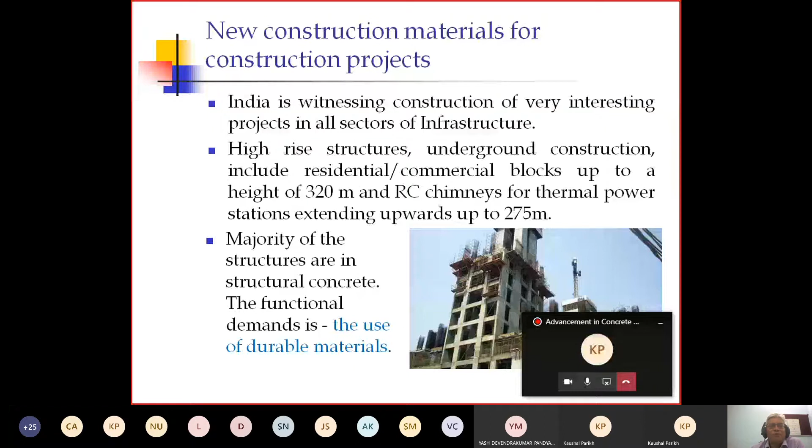Varieties of structures are there, but if you see majority of them, concrete is involved in one or other way. The functional demand is the use of durable material, and durability is a major concern in all construction projects. That is why a lot of evolution has taken place in the construction sector, particularly in the area of concrete. Time to time, the need for concrete has also changed, and accordingly, some new forms of concrete have to be used.

In the last two decades, we have seen many advances taking place in concrete that is gaining widespread acceptance, such as high strength concrete, high performance concrete, self-compacting concrete, durable concrete, using PPC, fly ash, slag, and other mineral admixtures.

Durability has gained much importance in the last two decades. Whichever structures were constructed 20, 30, 40 years back, we found a lot of deterioration because of the lack of the durability concept, and that is why the need arises to go for such kind of advances.

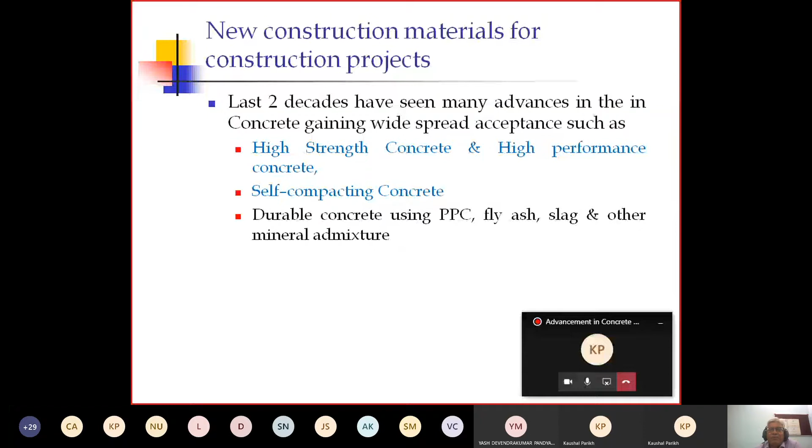Apart from basic structural material, the modern concrete projects require various secondary types of materials for varieties of purposes, such as construction chemicals and waterproofing materials. So there are varieties of such secondary materials that are used.

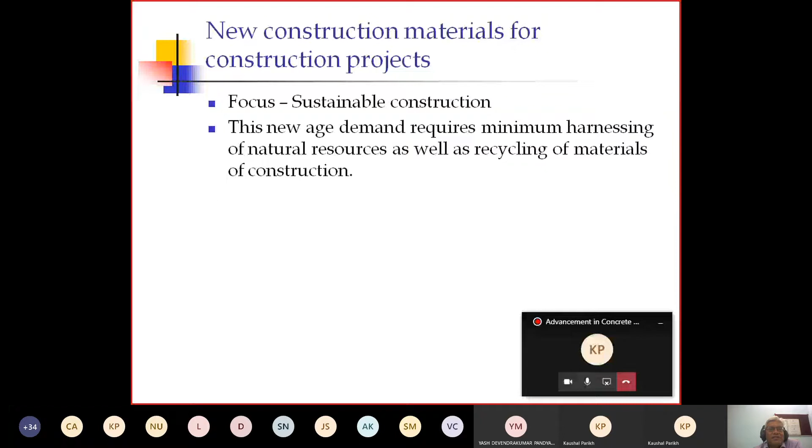Modern concrete is not only restricted to reinforced concrete and prestressed concrete, but there is widespread application in industrial uses - highway, pavement, landscape development, extreme weather conditions. So widespread applications are there, and that is why concrete is used in different applications.

Concrete has to improve its appearance, improve its aesthetic appearance, basically to look slim, designer, and colorful. Day by day, aesthetics plays an important role. Initially we have seen concrete look very bulky, but nowadays people prefer to go for its aesthetic appearance - it should also look slim, designer, colorful.

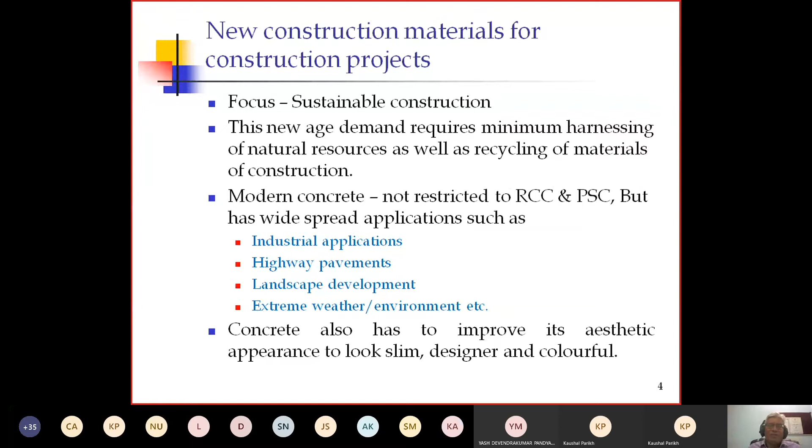So these are the different needs that arise as per the time, and time to time it evolves - concrete evolves with the basic need which is required for the human being.

So new age concrete should have many features that are required. Let us see which are the new features required in new age concrete.

First thing is it should look slim and sleek - that is one of the basic requirements. As human beings are also very conscious about their looks, looking for slim and sleek, the same way they prefer that our concrete should also look slim as well as sleek. Beauty naturally attracts human beings.

This is one of the very important things - minimum water to reduce the water demand. There is always a crisis of water, and that is why minimum consumption of water is required. Similarly, minimum or no cement to reduce the carbon emission.

As we know, the process of making cement involves carbon emissions, and that is one of the major concerns regarding environmental aspects or environmental issues. So that is why minimum or no cement is needed to reduce carbon emissions.

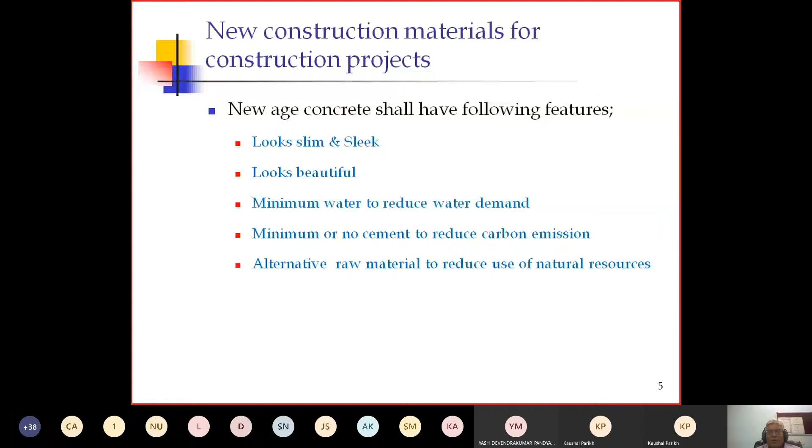Alternative raw material to reduce the use of natural resources - there is always pressure on the use of natural resources, so we need alternative raw materials for reducing natural resource consumption.

And the last and very important thing is durability for longer life and lesser reconstructions. So whatever we are constructing, it should sustain for a longer period or longer life, and that is required.

So durability is a major concern, and it is required to be incorporated and given more importance. That is why all the codes, our Indian Standard Code, IS code, has also given due importance to this aspect of durability, and many provisions related to the durability of concrete have been incorporated.

This durability has been found to be of more concern in the last couple of decades, and that is why many codes in all the different countries have incorporated provisions related to durability for longer life and lesser reconstructions. So when we are talking about durable concrete...

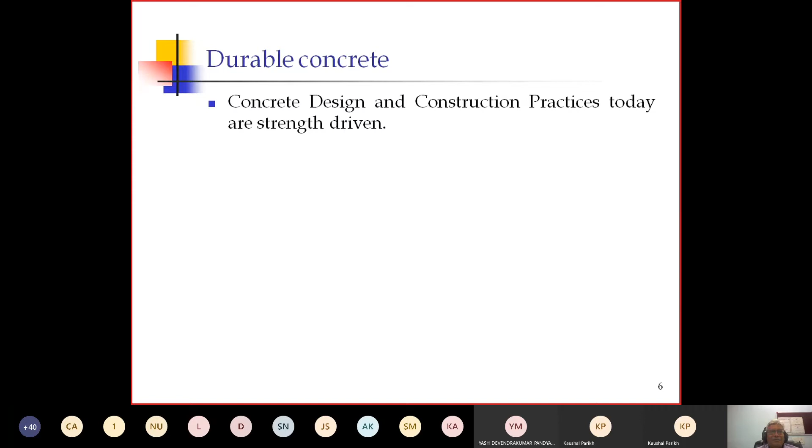Basically, if we see the majority of concrete design philosophy and construction practice, these are basically strength driven. Strength is the major concern, and then after that serviceability. But just in the last couple of years, durability has been incorporated into the IS code. Before that, there was very less concern for durability.

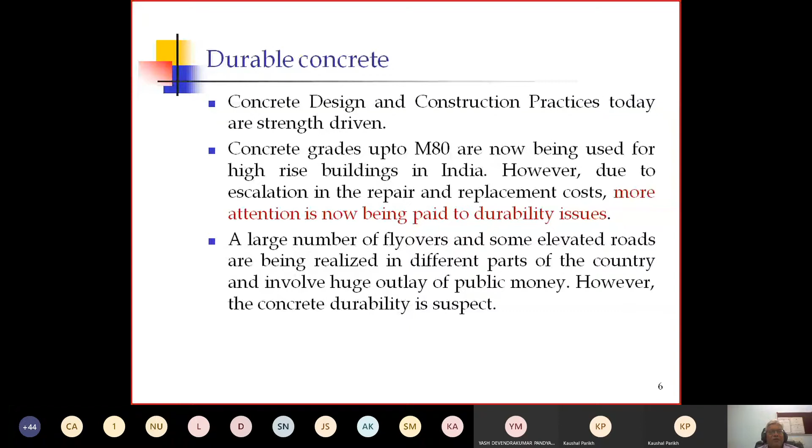A large number of flyovers and elevated roads are being realized in different parts of the country, involving huge outlay of public money. However, concrete durability is a concern. Large amounts of money are involved in such big projects, but when we talk about durability concern, it is always a suspect. So these are the issues.

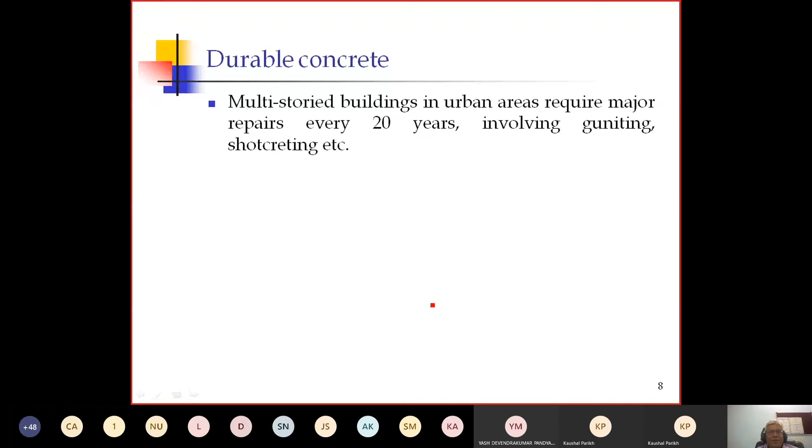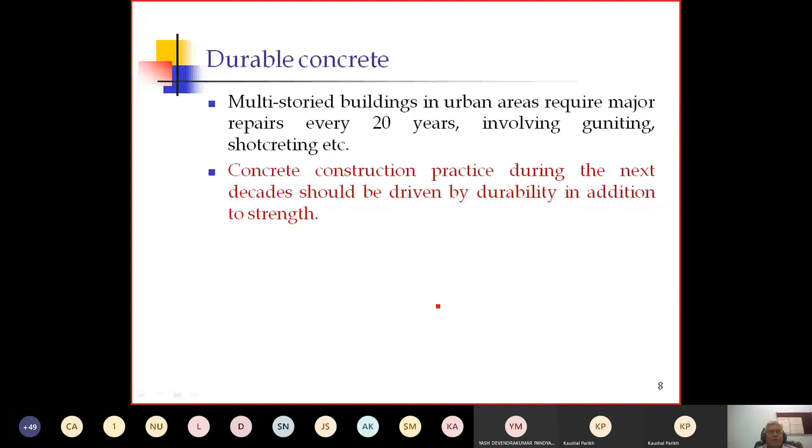Multi-story structures in urban areas require major repairs every 20 years, involving guniting and shotcreting. Because of lack of continuous maintenance, this kind of repair and rehabilitation of structures is required. So concrete construction practice during the next decade should be driven by durability in addition to strength and serviceability. We need to give proper attention to these durability issues, and that is why all codes in all countries have recognized the importance of durability and incorporated many clauses on durability into their codes.

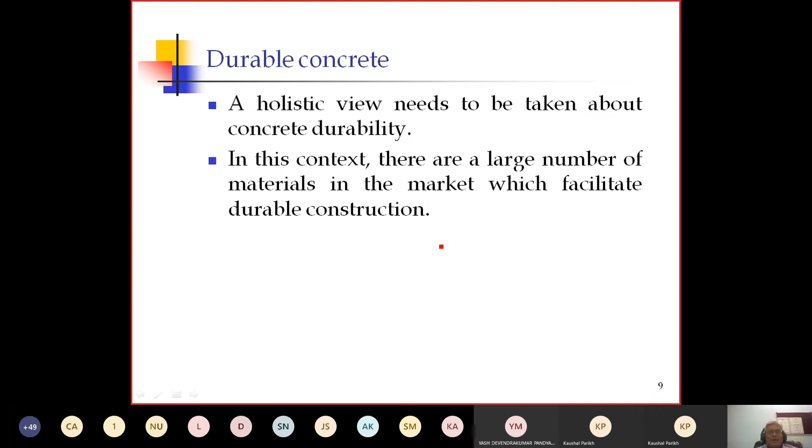A holistic view needs to be taken about concrete durability. We have to ensure that structures can survive for a longer time. In this context, there are a large number of materials in the market which facilitate durable construction. We have to think of different alternate materials which can be used as an additive to the concrete, adding value to the concrete, so that we can achieve durable construction.

Apart from the material, the construction process has also undergone changes with a view to improving the durability of finished structures. So when we talk about construction, it's both material and construction process - as new materials arrived, the construction process has also undergone changes with a view to improving durability. This is the major concern in achieving durability of concrete structures.

The first step we can see toward durability is high strength concrete. Of course normal strength concrete exists, but it has been found that it is not durable concrete. So the first attempt, the first evolution in that category, is high strength concrete.

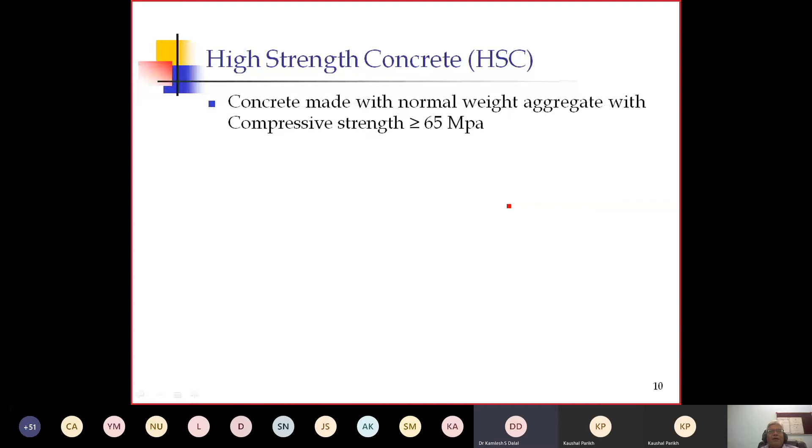Concrete which has compressive strength more than 65 megapascal is, as per the code, known as high strength concrete. Usually for high strength concrete mixes, specially selected cementitious materials and chemical admixtures, that is superplasticizers, are used, and achieving a low water cementitious material ratio is considered essential. By using different cementitious materials, chemical admixtures, and sometimes mineral admixtures also, with low water cement ratios, we can achieve a high strength concrete.

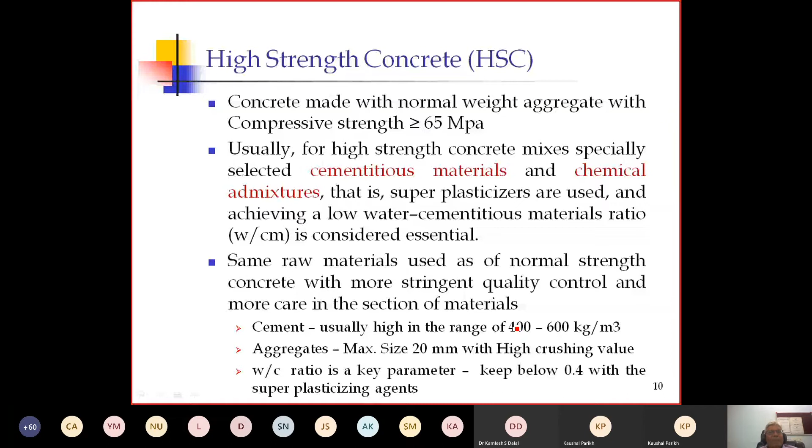Due to the low water cement ratio, an important characteristic of high strength concrete is its low permeability, which is key to long term durability in aggressive environments. Hence, high strength concrete can be used where durability rather than strength is the primary consideration. This is the first step in achieving durability in concrete - to go for high strength. Because of the low water cement ratio, there is low permeability and we get dense concrete, so it can work for a longer time. Long-term durability is achieved in aggressive environments also.

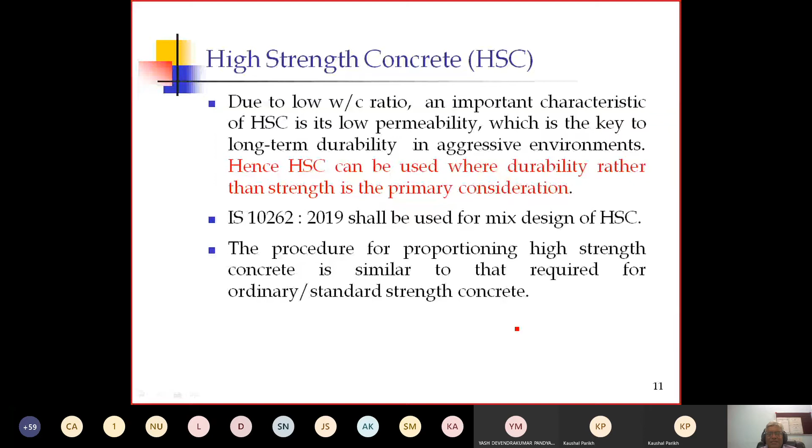IS 10262:2019 shall be used for the mix design of high strength concrete. The procedure for proportioning high strength concrete is very similar to that of ordinary or standard strength concrete. IS 10262:2019 is the new code, a 2019 publication, where the complete procedure and entire process is given for designing a mix for high strength concrete.

When we talk about cementitious materials, proper selection of the type of cement is a very important step for production of high strength concrete. Fly ash, silica fume, GGBS (ground granulated blast furnace slag), or metakaolin are the widely used cementitious materials and pozzolanic ingredients in high strength concrete. So in addition to cement, various mineral admixtures such as fly ash, silica fume, GGBS, metakaolin can be added in appropriate proportions.

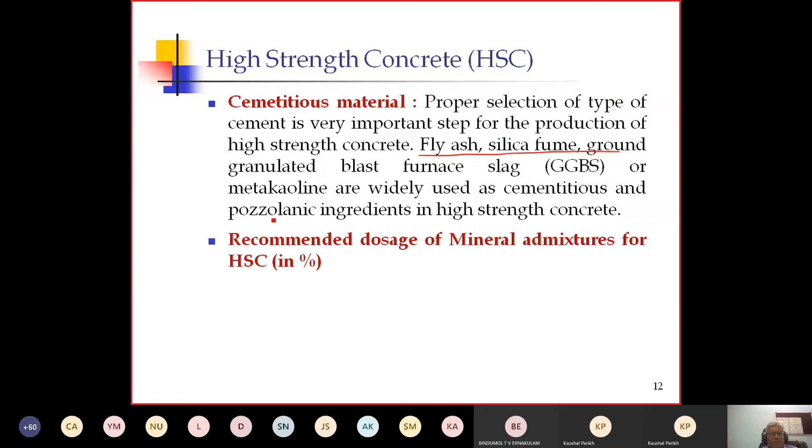Recommended dosage of mineral admixtures for high strength concrete: fly ash 15 to 30% is desirable, GGBS 25 to 50%, metakaolin 5 to 15%, silica fume 5 to 10%. These are the recommended doses prescribed by the IS code based on certain research carried out by many people in the area of high strength concrete. So we can add certain mineral admixtures in these proportions as part of the cementitious material, which can replace the cement.

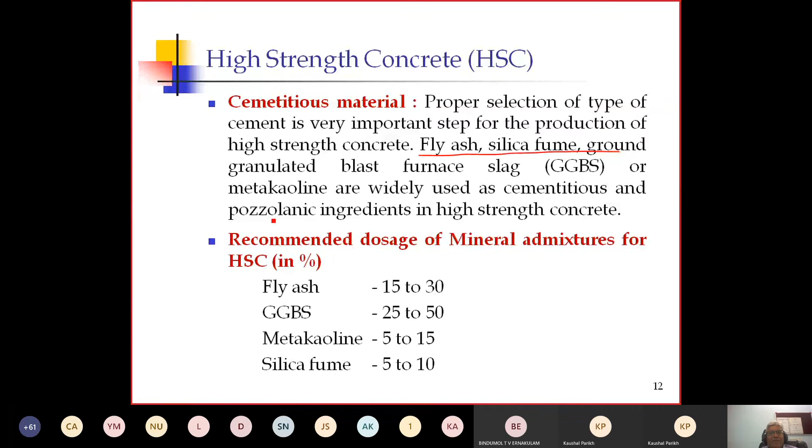Chemical admixtures: high strength concrete mixes usually have a low water cementitious material ratio. This is generally achieved by a high range water reducing agent, HRWRA. Polycarboxylate ether based, PC based superplasticizers can be used to reduce the water content by 30% or above at the appropriate dosage. So water reducing agents or high range water reducing agents can be used as superplasticizers for reducing the water demand, that is the water cementitious ratio, for making high strength concrete.

These are just a comparison of conventional concrete with high strength concrete, and nowadays there is also another term called ultra high strength concrete.

These are some of the range. Conventional concrete nowadays is used up to 50 megapascal. High strength concrete nowadays the definition range is up to 100 megapascal, and ultra high strength concrete may be above 200 megapascal. Water binder ratio, that is the water cementitious ratio, for normal concrete may be more than 0.5.

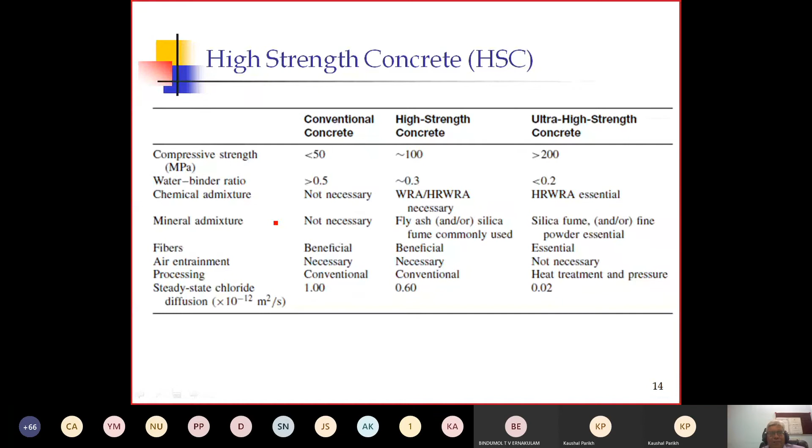Air entrainment is necessary in conventional and high strength concrete, but not necessary in ultra high strength concrete. So these are all the comparative criteria for conventional concrete, high strength concrete, and ultra high strength concrete.

Then we come to the next part, that is high performance concrete, which is the next version of high strength concrete. In high performance concrete, strength is definitely one of the concerns, but in addition to the strength, the performance of the concrete is very essential. So looking at the performance criteria laid down by the client or by the people, the name high performance concrete has been given.

So in high performance concrete, strength and durability are definitely a concern. But in addition, performance criteria are also to be laid down, and accordingly one has to ensure that the concrete performs during its initial period or during the service period.

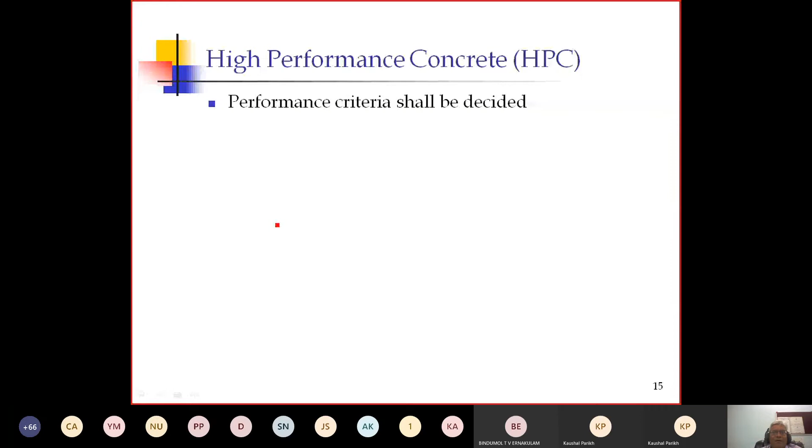So some of the performance criteria should be laid down by the authority or by the client. Let us say that in one project in the United States, in response to widespread cracking of concrete bridge decks, the construction process moved towards the use of high performance concrete mixes with the following performance criteria laid down by an authority.

Let us see: very high early strength concrete, that is 17.5 megapascal in 6 hours. High early strength concrete, that is 42.5 megapascal in 24 hours. A very high strength, that is 86 megapascal in 28 days. Durability factor, it should be more than 80% after 300 cycles of freezing and thawing.

This is the special criteria. Up to the first three criteria are related to strength, but this fourth criteria is related to durability, that is 80% after 300 cycles of freezing and thawing. Water cement ratio of 0.35 or less.

So similar type of criteria has to be fixed for high performance concrete, and accordingly the mix has been designed by making different trials. Trial and error is definitely required for making such a mix for high performance concrete. But otherwise the process is very similar to high strength concrete, just to ensure that whatever performance criteria are laid down are achieved.

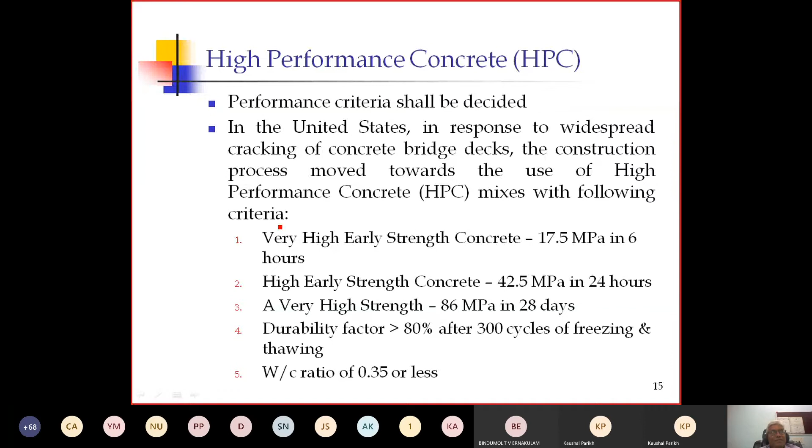During its performance, high performance concrete was introduced in India initially for the reconstruction of the pre-stressed concrete dome at the Kaiga atomic power project, followed by parts of the reactors at Tarapur and Rajasthan. So many atomic power plants or power projects use this kind of high performance concrete.

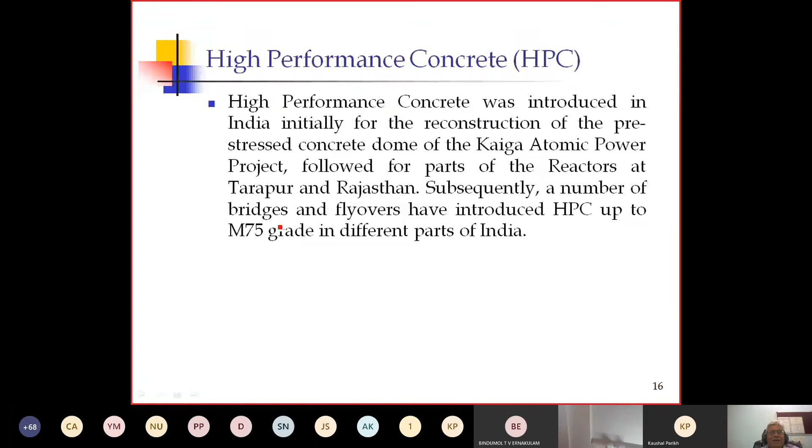Subsequently, a number of bridges and flyovers have introduced high performance concrete up to M75 grade in different parts of India. So it has already started in many important projects using high performance concrete. When we talk about high performance concrete, it should have three main criteria: strength, workability, and durability. One can lay down the performance criteria based on these three parameters, and accordingly the concrete mix can be determined.

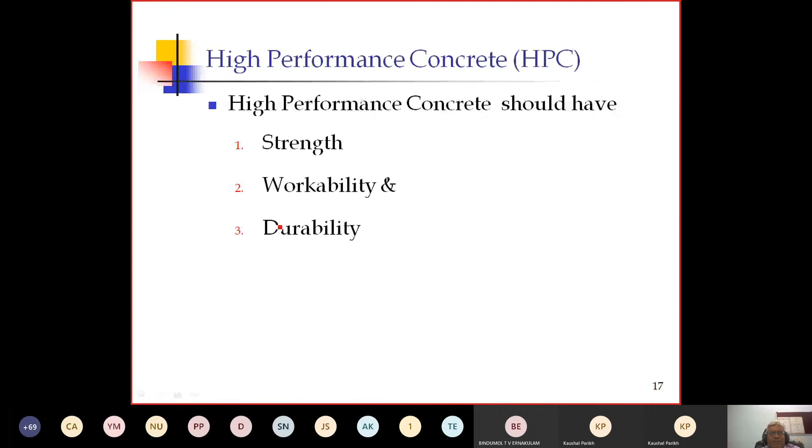Then let us go to the next stage of concrete, which has evolved and is now used in many places: self-compacting concrete. Self-compacting concrete was actually developed in Japan initially as a quality assurance measure, but now it is being widely used for concrete structures worldwide. Let us see the many components of the structures. I think this is one of the very common scenarios of reinforced concrete structures.

When we reduce the size of an element, naturally the reinforcement will be increasing, particularly at the joints, where there is congestion of reinforcement. Large numbers of reinforcements are there at the congestion at the joint, and because of that it's not very easy to pass the concrete through these kinds of situations.

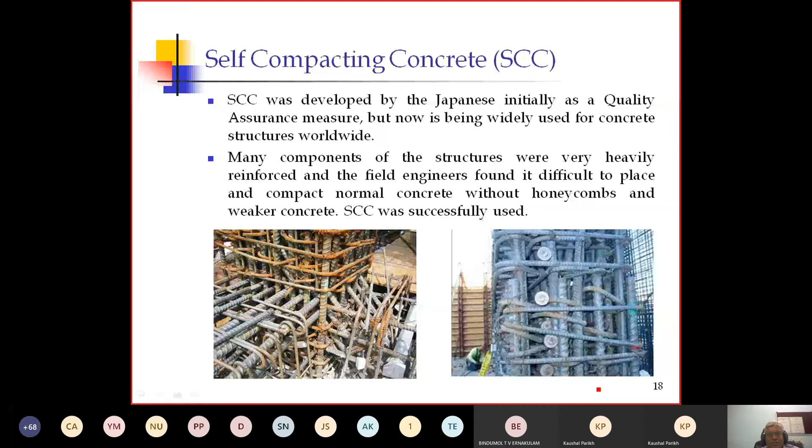Many components of the structures were very heavily reinforced, and the field engineers found it difficult to place and compact normal concrete without honeycombs and weaker concrete. So self-compacting concrete was successfully used under these situations, basically because of the need that arose due to congestion of reinforcement, particularly at the joints in reinforced concrete structures.

Self-compacting concrete, leaving the batching plant, is in a semi-fluid state, and is placed into the formwork without the use of a vibrator. You can avoid the vibrator, otherwise a vibrator is essential in normal concrete. Due to its fluidity, self-compacting concrete is able to find its way into the formwork and in between the reinforcement, and gets self-compacted in the process.

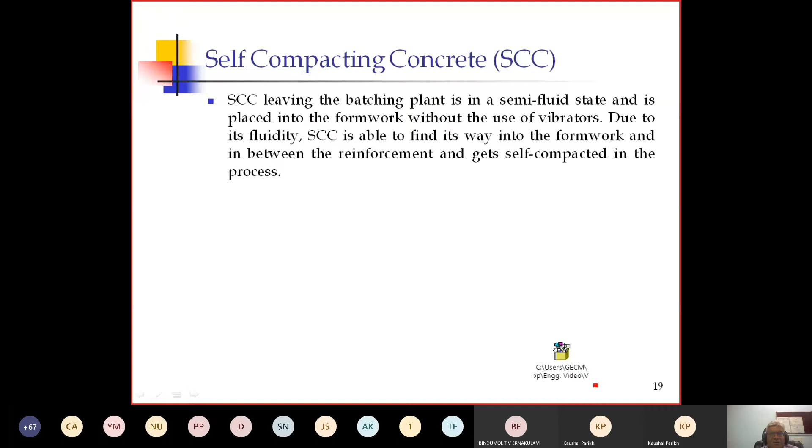Let us have a look at this video.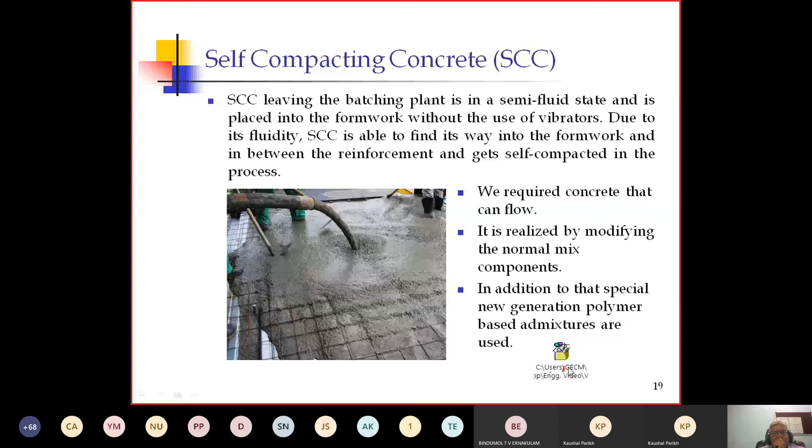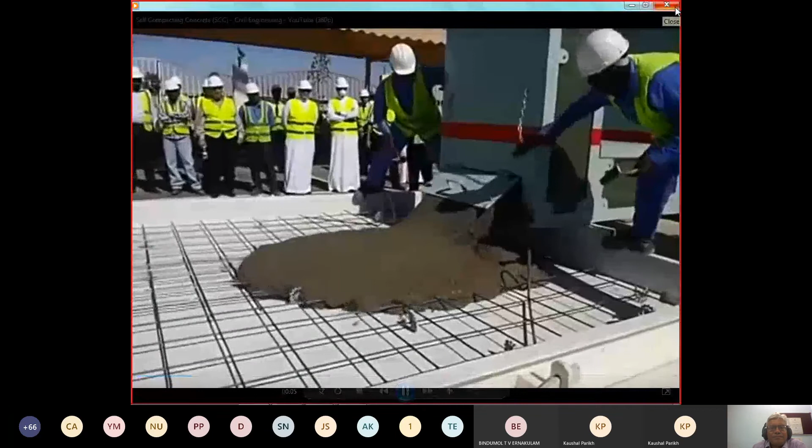Is this video visible? Sir, the video gets stopped. Yes, I will start it once again. Is it visible now? Yes sir, it is visible.

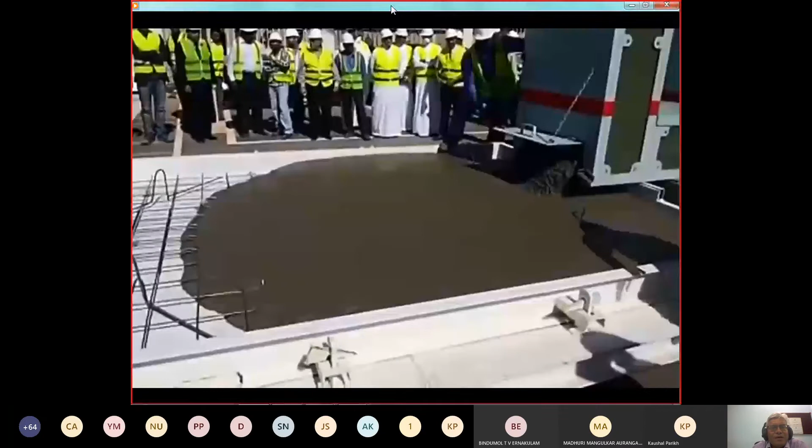See how flowable this concrete is. So when it is poured into the element, you can see the place at which it is going to reach into the concrete. This is the characteristics of the self-compacting concrete.

Now you can see that this kind of concrete can easily pass even though there is congestion of the reinforcement, and it is also self-compacted. That is why the name self-compacting concrete is given.

Hello. Is it audible now? Am I audible? Audible sir, audible, yes sir. Actually I have not unmuted. Somewhere, maybe in the process, sometimes it may be muted. I'm not sure. Shall I repeat some of the things, because one slide may require to be repeated? No sir, you may continue, no issue, you may continue sir.

Okay. Is it okay? Yes, sir. Perfect, sir. Okay.

Due to high fluidity, the traditional method of measuring workability is not suitable, particularly for self-compacting concrete.

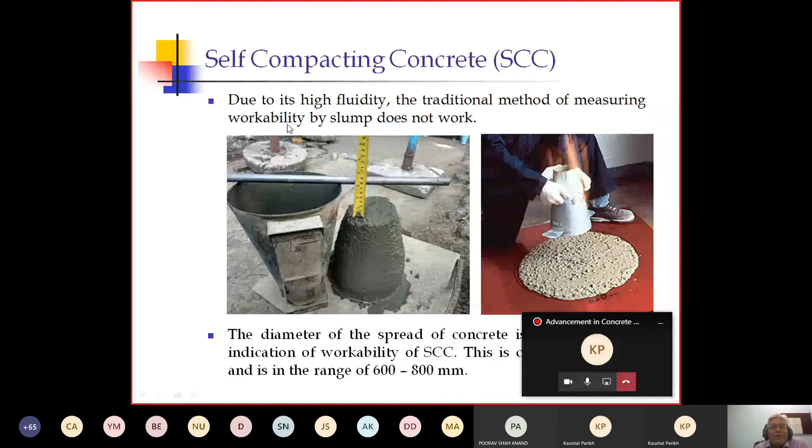Apart from the use of superior grade chemical admixtures, the physical composition of concrete for self-compacting concrete has also undergone changes. The concrete is required to have more fine aggregates, and compulsorily any mineral admixtures such as fly ash, GGBFS, silica fume, metakaolin, or rice husk ash shall be used.

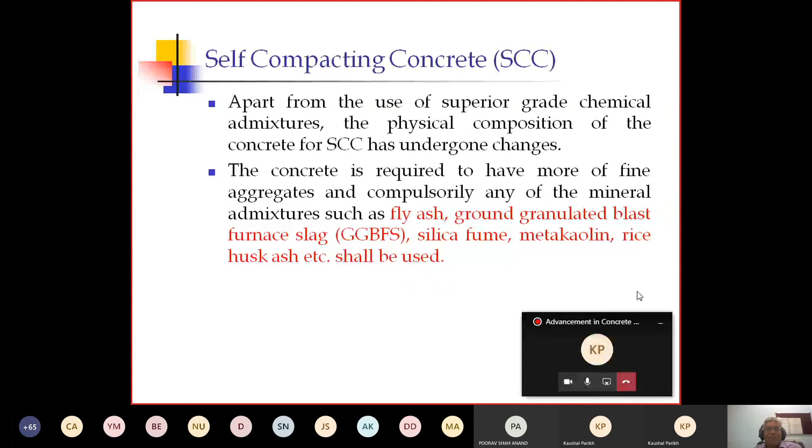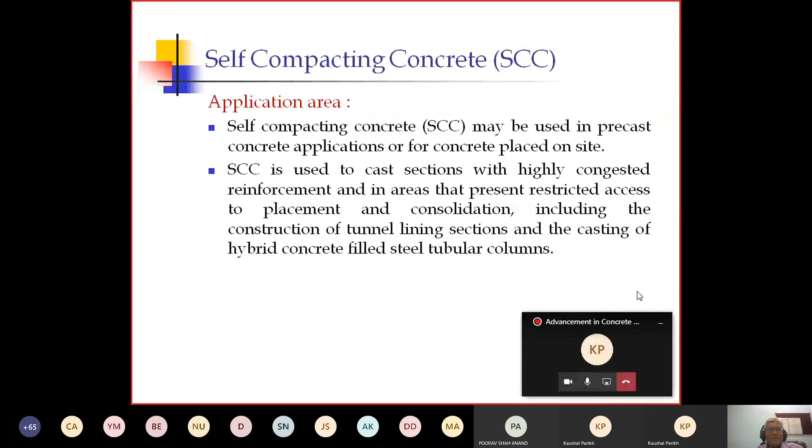Its application area: self-compacting concrete may be used in precast concrete applications or for concrete placed on site. SCC is used to cast sections with highly congested reinforcement, and in areas that present restricted access to placement and consolidation, including the construction of tunnel lining sections and the casting of hybrid concrete filled steel tubular columns.

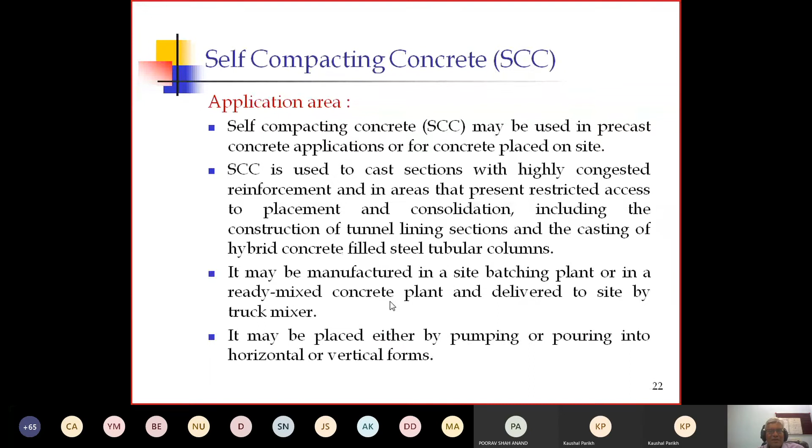It may be manufactured in a site batching plant or in a ready-mix concrete plant and delivered to site by truck mixer. It may be placed either by pumping or pouring into a horizontal or vertical form.

Some of the chemical admixtures to be used are superplasticizers. Water reducing agents or high range water reducing agents are low molecular weight compounds.

These are designed to be used in the concrete mixtures in order to improve workability.

Viscosity modifying agents are high molecular weight water soluble polymers used to raise the viscosity of the water, increasing viscosity without increasing the chances of segregation.

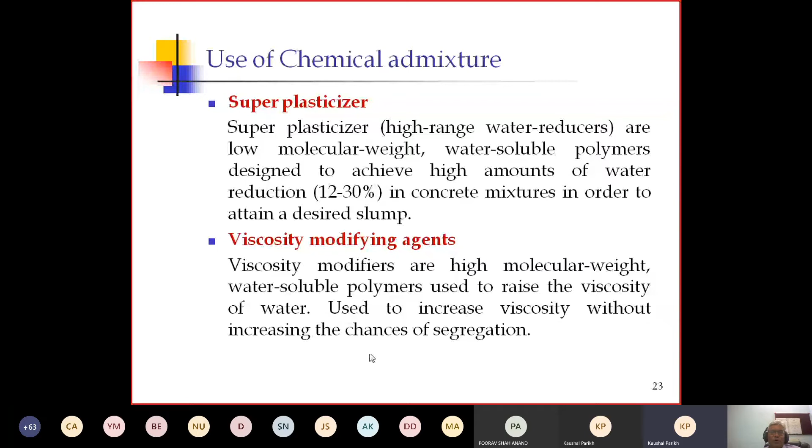Fly ash reduces the chances of shrinkage, and materials like fly ash, GGBS can be used whenever there is a need.

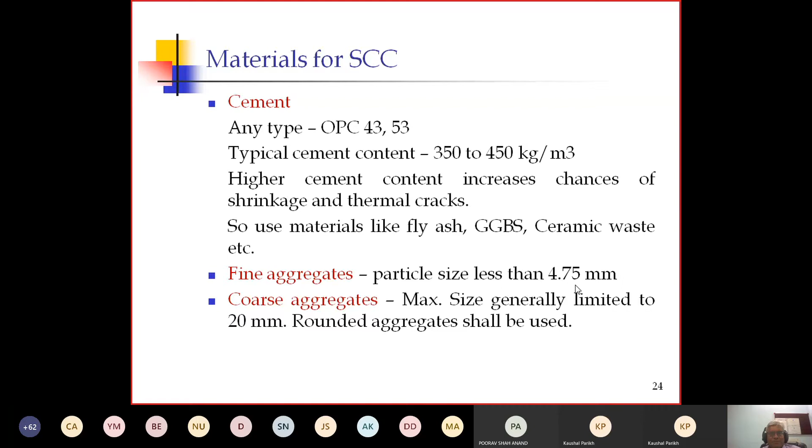Fine aggregate size should be less than 4.75 mm. Coarse aggregate maximum size is generally limited to 20 mm. Rounded aggregate shall be used. Ordinary potable water can be used.

A concrete mix can only be classified as self-compacting concrete if the requirements for all the different characteristics are satisfied.

These characteristics are: filling ability, also known as flowability; second, passing ability; third, segregation resistance; and fourth, viscosity. These are the four characteristics. If all of these are present in the concrete, then it can be said to be self-compacting concrete.

So whenever we are going to make self-compacting concrete, one has to verify these characteristics: filling ability, passing ability, segregation resistance, and viscosity.

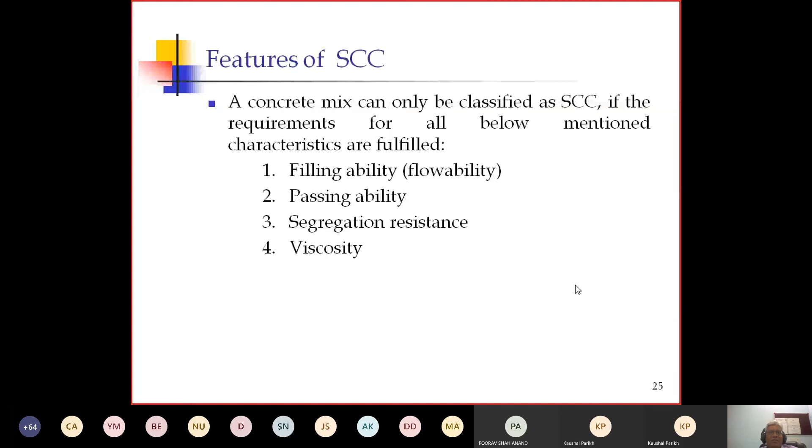Various workability tests are used for self-compacting concrete, which are a little different from normal strength concrete: slump flow, V-funnel test, L-box, U-box, fill box, and J-ring. These are the various tests prescribed by the code.

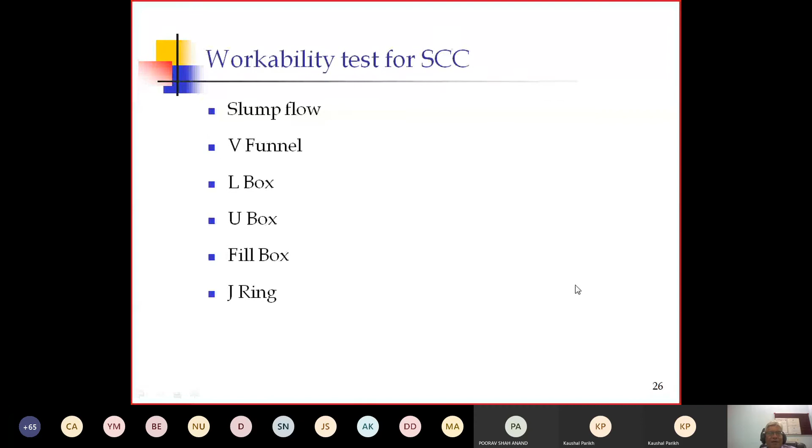Whenever we are working with self-compacting concrete, there are different workability tests that one needs to conduct. These include the slump flow or slump cone test, which is a normal slump cone used in normal concrete, but here different sizes are used. This is basically used for filling ability.

J-ring is for passing ability. V-funnel is for filling ability. L-box is for passing ability. U-box is for passing ability. Fill box is for passing ability. V-funnel is also used for segregation resistance.

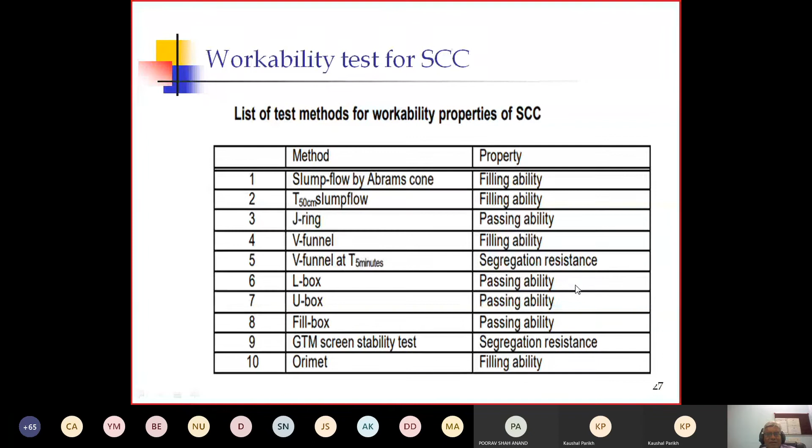Whatever properties of self-compacting concrete we have discussed, different tests are required to be conducted for measuring these properties.

Whenever we are going to conduct the workability test of self-compacting concrete, these acceptance criteria must be followed. Only then can it be used, otherwise it cannot be. These are some pictures just to give an idea.

The cone used is very similar to that of normal strength concrete, but instead of measuring the height of the cone, here we measure the diameter of the flow. When we lift the cone, the concrete flows, and whatever diameter of flow results, we measure D1 and D2, and based on that it can be decided.

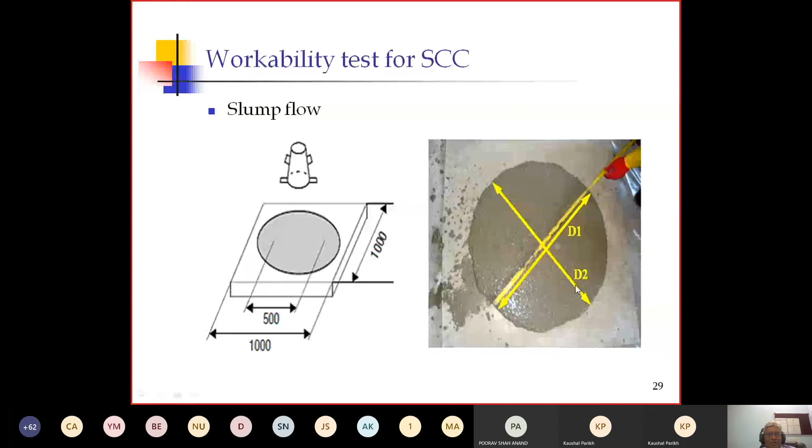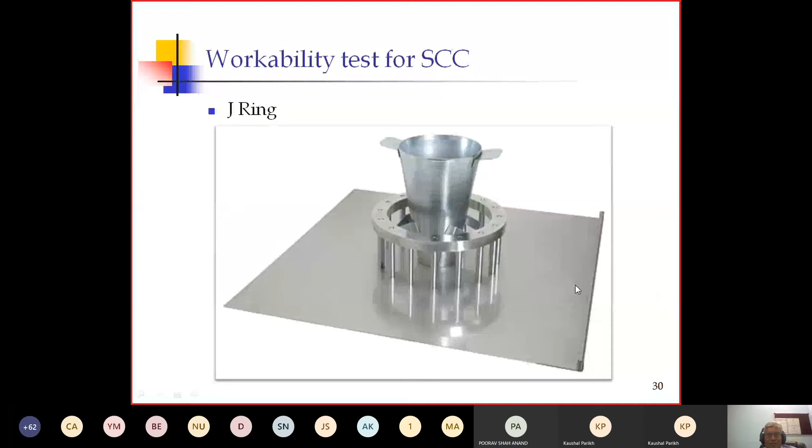So it is simulating similar kind of things here. J-ring test, similarly V funnel test. This is also the passing ability as well as segregation of the concrete, so both the properties can be measured.

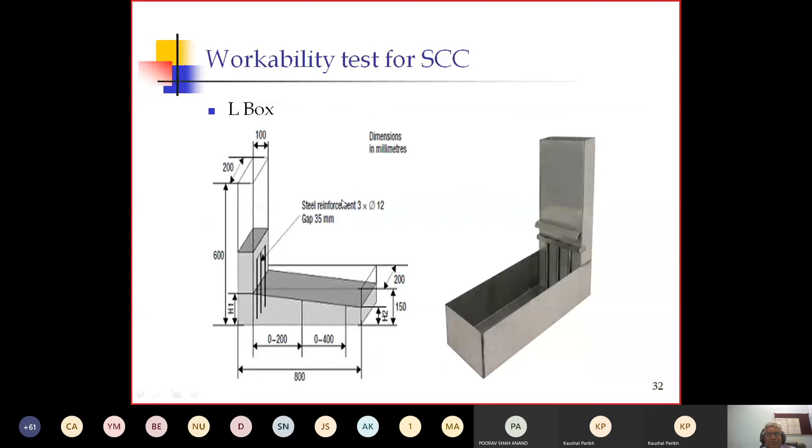L box test: here the concrete is to be poured, and then the door will be open. When the door is open, how it is going to travel - based on that, the workability of the concrete is to be decided. So this is the L box test.

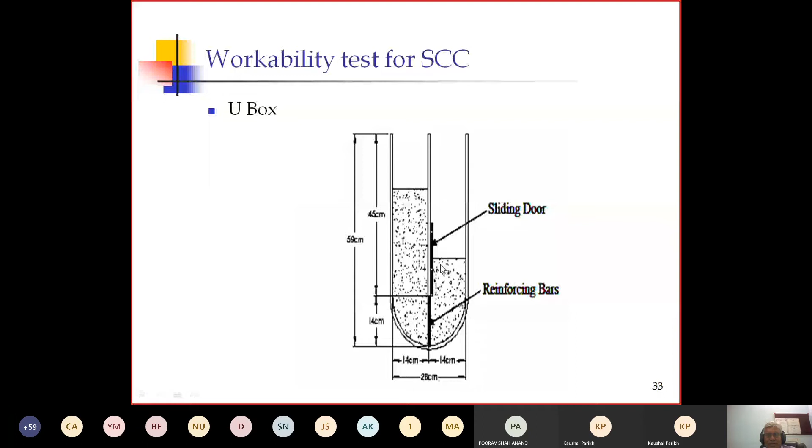Similarly, U box test is also there. Again it is a similar type, but concrete is filled in one half, and then the doors will be open, so how it is going to be moved to the other side. These are sliding doors, and concrete is moved to the other side - to what extent, to what height it is going to move. Based on that, the workability can be measured. So this is the U box test, and this is the fill box test.

So all these tests which we have discussed here will measure the workability, but basically the 4 different characteristics which we have discussed - that will be used for the self-compacting concrete.

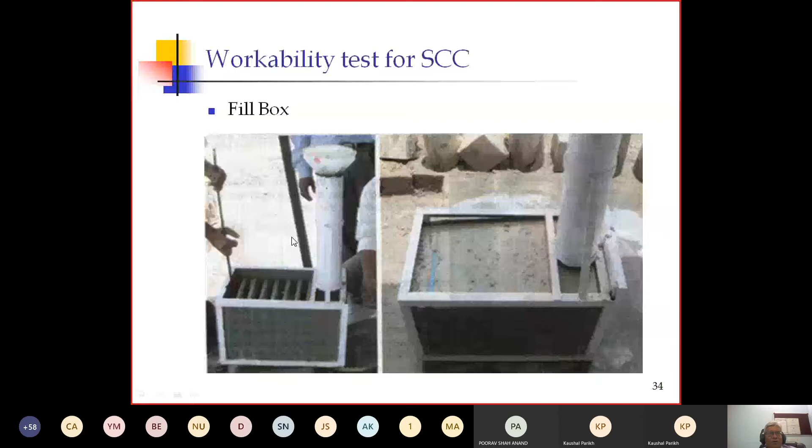So self-compacting concrete, basically nowadays it is used at many places. The mixed constituents of the self-compacting concrete, you can design this mix by using IS 10262:2019. The code has given detailed criteria and step-by-step procedures for getting the mix design of the self-compacting concrete. Typical range of the mix constituents:

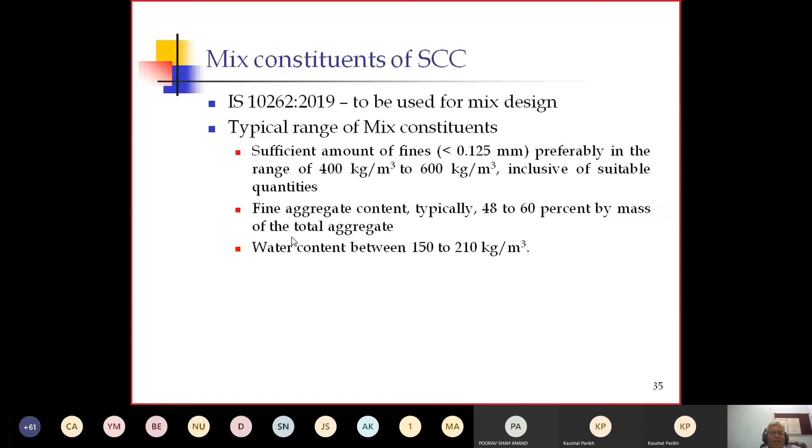Sufficient amount of fines, preferably in the range of 400 kg per meter cube to 600 kg per meter cube, inclusive of the suitable quantities. Fine aggregate content typically 48 to 60% by mass of the total aggregates. Water content between 150 to 210 kg per meter cube. These are the criteria prescribed in IS 10262.

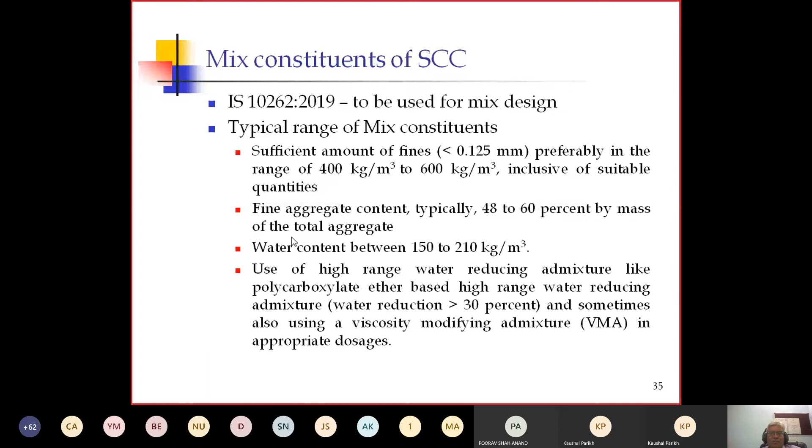Use of high range water reducing admixtures like polycarboxylate ether based high range water reducing admixtures, which can give water reduction of more than 30%. And sometimes also using viscosity modifying admixtures in appropriate doses, just to maintain that segregation will not take place. There is a need to go for viscosity modifying agents. So chemical admixtures like water reducing agents for reduction in water content, and viscosity modifying admixtures, are the essential need for self-compacting concrete.

After realization of the need for durable concrete structures, the composition of concrete has undergone changes. To reduce the cement-based content, both the water content and the cement content must be reduced as much as possible. So this is basically the need of today's concrete, to reduce the water content and the cement content.

Concrete mixes can be produced by blending the cement with mineral admixtures, either in the batching plant or in the cement plant. This enhances the service life of the concrete structures in a cost-effective manner. So the addition - concrete mixes can be produced by blending the cement with mineral admixtures. That is one of the needs of today's concrete, and this can be achieved in self-compacting concrete or even high-strength concrete. So mineral admixtures are essential.

So use of mineral admixtures, where fly ash is the first contender to be used as a replacement of cement. Thermal power stations are left with an undesirable byproduct known as fly ash in large quantity, which they are not able to effectively utilize or dispose of. So it is basically a byproduct of thermal power stations.

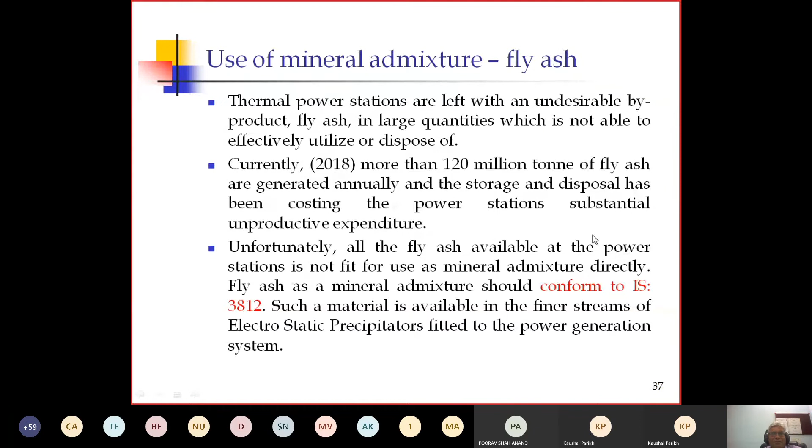Unfortunately, all the fly ash available at the power station is not fit for use as a mineral admixture directly. Fly ash as a mineral admixture should conform to IS 3812. Such material is available in finer streams of the electrostatic precipitators fitted to the power generation system. So all the fly ash directly obtained from the thermal power station cannot be used, but it can be processed - the coarser materials are required to be processed before being considered for use as a mineral admixture for concrete. There are only a few processing units in India, including Nasik thermal power station. So processed fly ash will be used.

As per the Eurocode, only processed fly ash can be permitted as a mineral admixture in concrete. The code limits the use of fly ash to about 30% replacement of cement, and the actual percentage of replacement depends on trial mixes that can be performed. Based on the trial mixes, one can determine the mix proportion using fly ash cement with the addition of fly ash cementitious material.

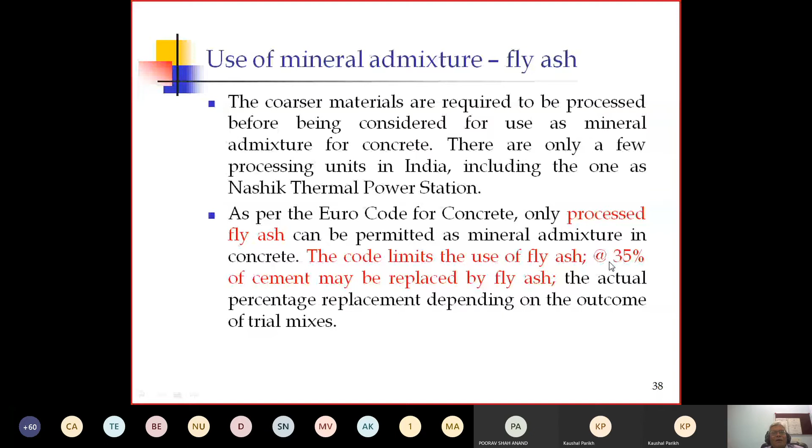There is also another development in fly ash, that is high volume fly ash concrete, which represents an emerging technology for highly durable and resource efficient concrete structures.

Laboratory and field experience have shown that fly ash from modern coal-fired thermal power plants, when used in large volume, that is in the range of 50 to 60% by mass of the cementitious material, is able to impart excellent workability in fresh concrete at a water content 15 to 20% lesser than without fly ash. So to obtain adequate strength at an early stage, further reduction in mixing water content can be achieved with better aggregate grading and use of superplasticizers. Basically, in high volume fly ash concrete, we can go beyond 50 to 60% replacement of cement, making it an emerging technology for highly durable and resource efficient concrete structures.

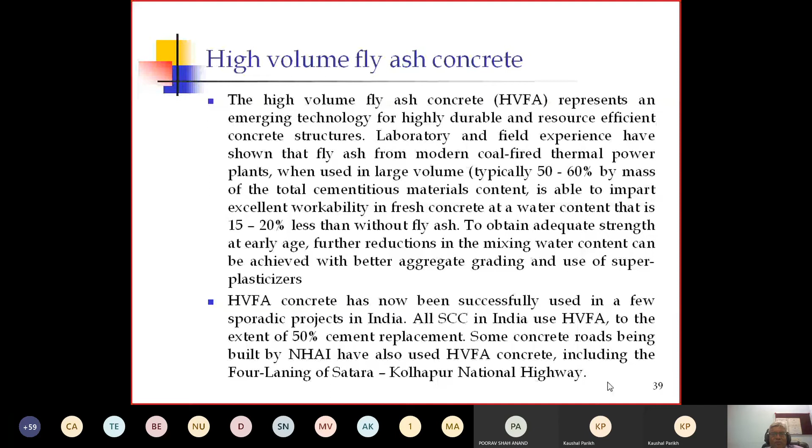High volume fly ash concrete has now been successfully used in a few projects in India. All self-compacting concrete in India uses high volume fly ash concrete to the extent of 50% cement replacement. Some concrete roads built by the NHAI have also used high volume fly ash concrete, including the 4-laning of the Satara-Kolhapur National Highway project. In many national highway pavement projects, they are using high volume fly ash concrete, where the fly ash is in the range of 50 to 60% replacement of cement.

There is another mineral admixture used as a replacement of cement or cementitious material, known as GGBS, or ground granulated blast furnace slag. The problem associated with the quality of fly ash does not exist in case of GGBFS, as the product is the outcome of grinding to the required particle size. Basically, the process of GGBS is just grinding the particles, and that is why the problems we face with fly ash do not exist with GGBFS.

The use of GGBFS as a mineral admixture should be preferred despite the long lead time for end users in certain parts of India far from the steel plants. This is one of the issues with using GGBS, that it has to be obtained from places far away from the steel plant. So GGBS sold in India is of uniform quality, and as far as quality is concerned, there won't be any trouble, because it is achieved through the grinding of particles.

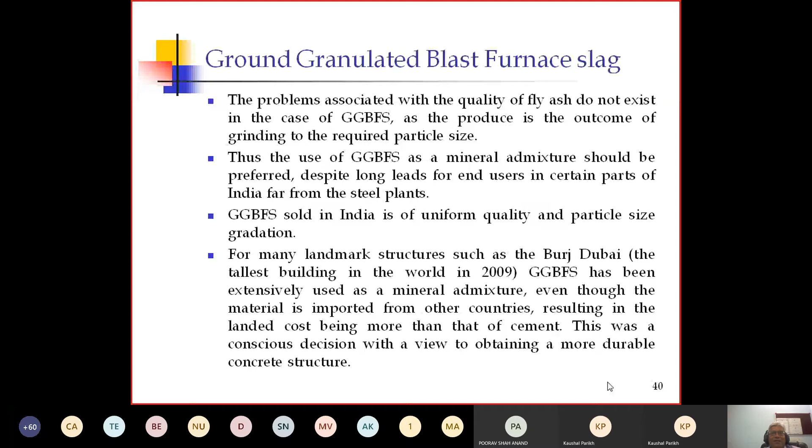In India, the use of GGBFS has been fairly limited in spite of all the technological advantages. The Indian Concrete Code permits up to 70% cement replacement where GGBFS is used. Technically, the use of GGBFS is more effective only at a replacement level of 50% or more. For a number of structures in a port in Andhra Pradesh, typically the M40 concrete mix contained 100 kg of cement with 300 kg of GGBFS. So in the typical range, 50% or more can be used as cement replacement with GGBS.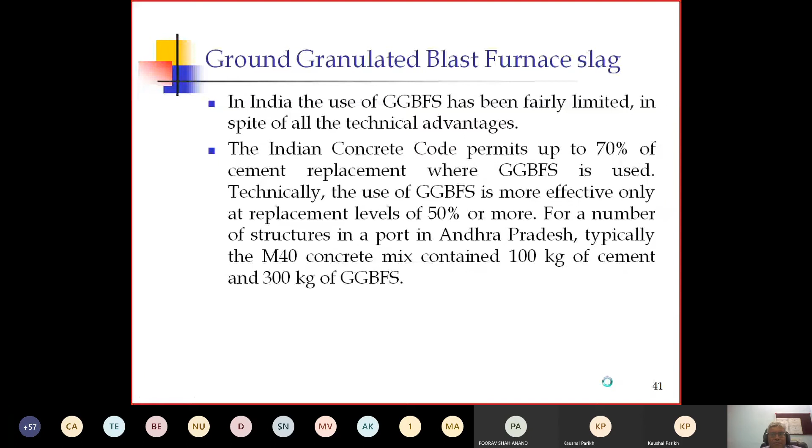Next, I will go to Portland slag cement. Portland slag cement is also available and useful for ensuring the durability of concrete structures. Due to the proximity of steel mills, it is basically a byproduct of the steel mills, so Portland slag is generally produced in a location close to the steel plants.

Here again, due to the bulky nature of the product, the transportation cost is predominant. Another issue concerning the quality of PSC is the actual percentage replacement while making it. This information is not normally displayed on the bag, leaving the user at a disadvantage. Whereas in some developed countries, information regarding the percentage of slag utilized in making the PSC is generally printed on each bag. This is a concern in our country, that this is not seriously taken care of in the bags.

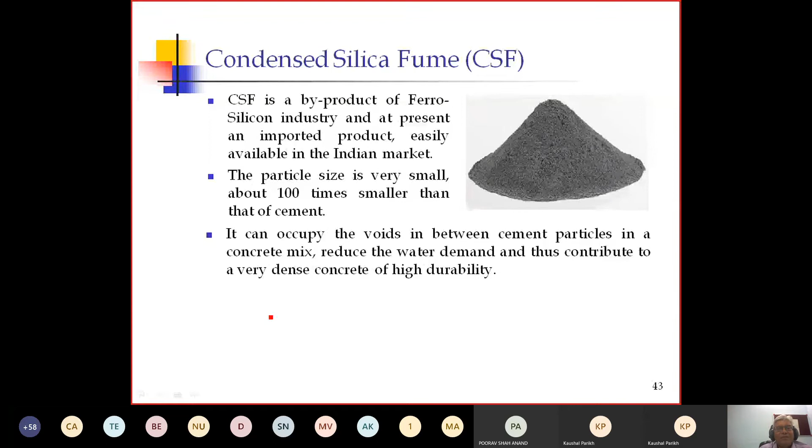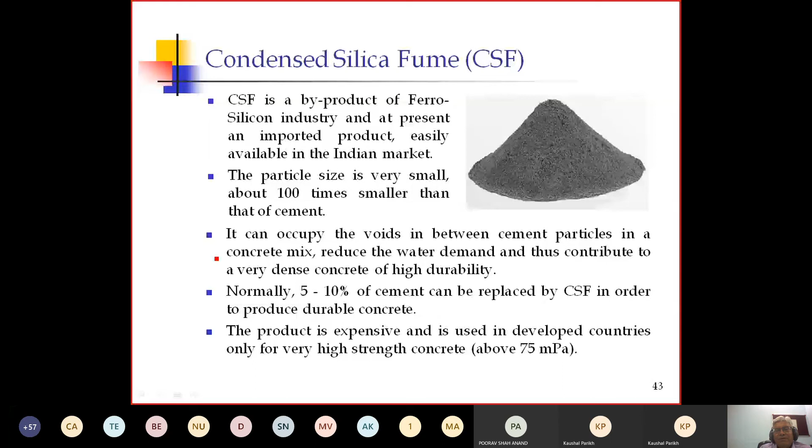Normally it is used in a less percentage, 5 to 10% of the cement can be replaced by condensed silica fume in order to produce durable concrete. The product is expensive and is used in developed countries only for very high strength concrete. As we have seen, in ultra high strength concrete, silica fume is the essential component, about 75 megapascal or so. If we have to go there, there is a need of using silica fume as one of the cementitious replacement particles.

Reinforcement is not a part of the concrete, but when we talk about concrete structures, reinforcement is definitely there, because concrete is weak in tension, and that is why reinforcement is inserted into the concrete to increase its tensile strength. These reinforcements can enhance the tensile strength of the concrete, so we will discuss advancements in reinforcement that are used to make advanced concrete, to increase the tensile carrying capacity, and correspondingly the compressive capacity would also increase.

The revised Bureau of Indian Standard Code provides 4 grades of reinforcement characterized by yield strength: FE 415, 500, 550 and 600. Each of the first 3 grades is also available with superior ductile properties, nomenclatured as 415D, 500D, or 550D. D stands for superior ductility. Primarily, the ductile grades specify higher elongation. Ductility is a major concern in making structures under-reinforced, as well as earthquake resistant, so to make structures ductile, it is always preferred to use ductile reinforcement.

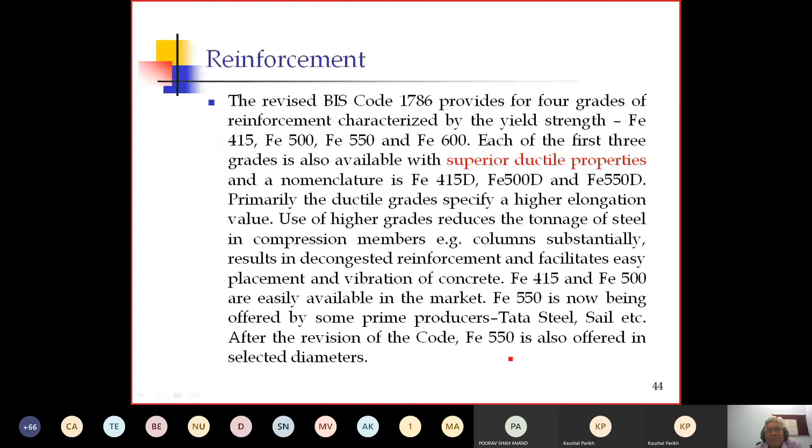So use of reinforcement with a high grade of concrete with superior ductile property is used. FE 415 and FE 500 are easily available in the market. FE 550 is now being offered by some prime producers like Tata, SAIL, etc. After the revision of the code, FE 550 is also offered in selected diameters. FE 500 bars are now used for numbers of high-rise buildings, bridges, and flyovers in India.

Lapping of bars results in congestion. This is one of the very important criteria: when we go for lapping of the bar, there is congestion of the steel reinforcement. It creates difficulty in proper placement and compaction of the concrete, and is more expensive for large diameter bars. So couplers are nowadays preferred instead of lapping.

As we know, 1/3 of the length is going to be lapped, so particularly at these places there is more congestion of the reinforcement, and because of that the concrete cannot be easily placed there. So instead of going for lapping of the reinforcement, if we can use couplers, this problem can be reduced. With widespread use, the cost of the coupler has come down.

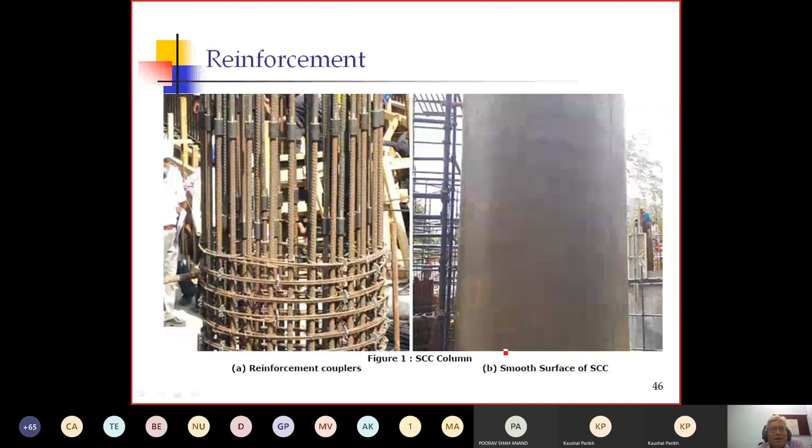We can also use certain specific cements, like ternary blended cement. Blended cement is one of the evolvements to be there. Ternary blended cements contain a combination of fly ash and slag, or fly ash and silica fume, or slag and silica fume. So in addition to normal cement, there is fly ash or slag, making three different constituents for the cementitious material.

This is what is known as ternary blended cement. By combination of cement with fly ash and slag, or fly ash and silica fume, or slag and silica fume, these are commonly used for concrete in many parts of the world. European standards are used for getting mix proportions and other related criteria, since our standards are not available. For cement, they list 27 different combinations.

Ternary cement containing a proportion of limestone filler and 20 to 30% GGBFS provides good resistance to chloride ingress and good performance in the sulfate environment of low C3A Portland cement. So blended cements are used particularly for such requirements - basically giving good chloride resistance and good performance in the sulfate environment of low C3A Portland cement.

Then photocatalytic cement - this is a patented Portland cement developed by the Italcementi Group. The photocatalytic component uses energy from ultraviolet rays to oxidize most organic and some inorganic compounds. Air pollutants that would basically result in discoloration of exposed surfaces are removed from the atmosphere by these components, and the residues are washed off by the rain.

This cement can be used to produce concrete and plaster products that save on maintenance cost while ensuring a cleaner environment. In addition to the Portland cement binders, the product contains photocatalytic titanium dioxide particles. This cement is already being used for sound barriers, concrete paver blocks, and facade elements, architectural planters, pavements, and concrete masonry units.

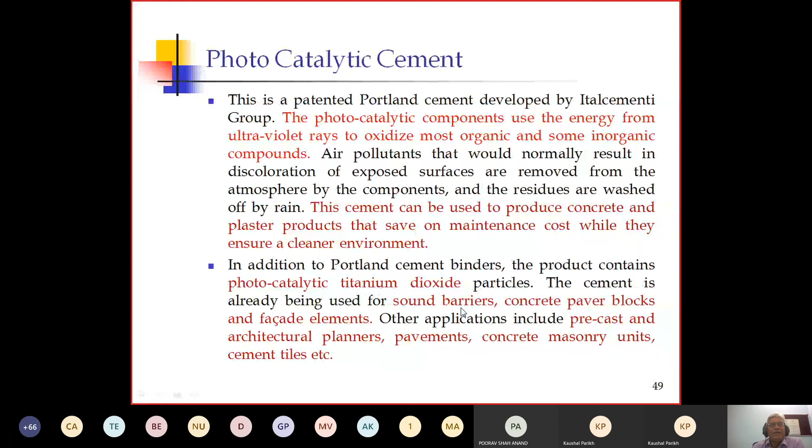So this kind of cement is basically used very well where there is a noise barrier. So at noise barriers or concrete paver blocks, these kinds of cements are used.

Coarse aggregate: basically there are three types of coarse aggregates, that is natural gravel, crushed stone, or a blend of both. Many outstanding structures built in India in the past had used river gravel as the coarse aggregate for concrete, including

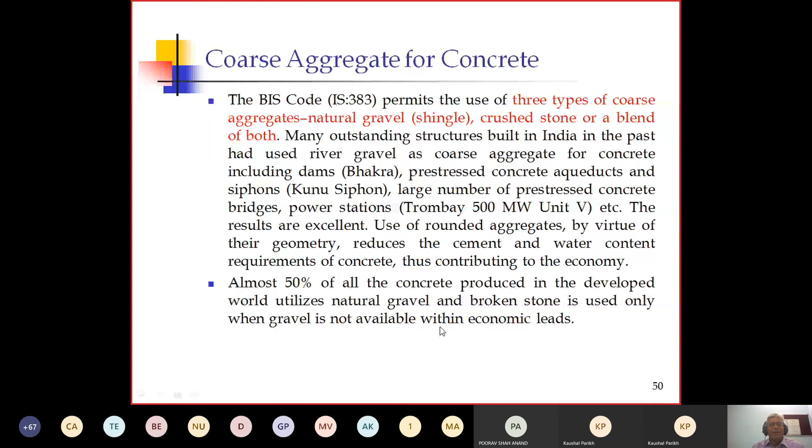Almost 50% of all concrete produced in the developed world utilizes natural gravel, and broken stone is used only when gravel is not available within the economic lead. So one can also think of recycled aggregate. This is one of the needs of today. As we know, there are large numbers of construction activities and concrete structures found across the globe, and when they deteriorate there is a need for demolition, and it becomes a big question of just

keeping all this debris, so it's a matter of big trouble. In the last decade or so, a lot of research has been carried out on using recycled aggregate, so this is one area where there is a need to seriously think in this direction. With continuous development activity worldwide, the availability of coarse aggregate from natural sources or crushed rock is dwindling.

At the same time, due to the demolition of old structures, roads, etc., a large amount of debris is generated annually, and their disposal poses a problem for individuals and governments. In many countries, including the UK, any demolition agency is not permitted to dispose of debris except at a predetermined location, which may involve very long leads and expensive operations. Very few countries have such serious or stringent rules for predetermined disposal locations, and because of that you can see heaps of

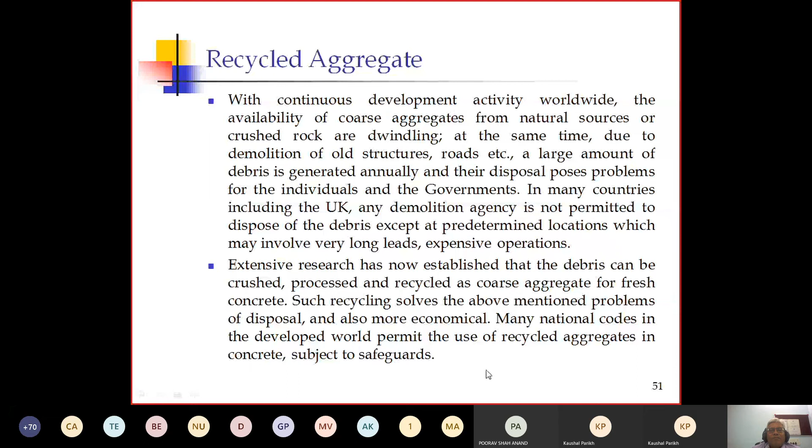Lightweight aggregate is also a need of today, because there is always pressure on reducing the dead load of structures. These are manufactured products and are extensively used in all types of structures involving longer spans, where the dead load forms a major component of the loads involved in the design.

Such lightweight aggregates are manufactured products using expanded clay, sintered fly ash, etc. Their contribution to strength depends on the type and quality of the lightweight aggregate, the size fraction used, the amount of aggregate used, and the type and quality of the binders in the concrete. However, in addition, lightweight aggregate in concrete reduces the modulus of elasticity. This is again a concern, as it reduces the modulus of elasticity, and that is why the stiffness of the element is also reduced.

So one can think of using lightweight concrete very consciously, because while it reduces the dead weight of structures and elements, the stiffness is also going to be reduced. So one must take care cautiously when using lightweight aggregate. There is also another thing: self-curing and shrinkage-free concrete. Many people have started using this self-curing and shrinkage-free concrete.

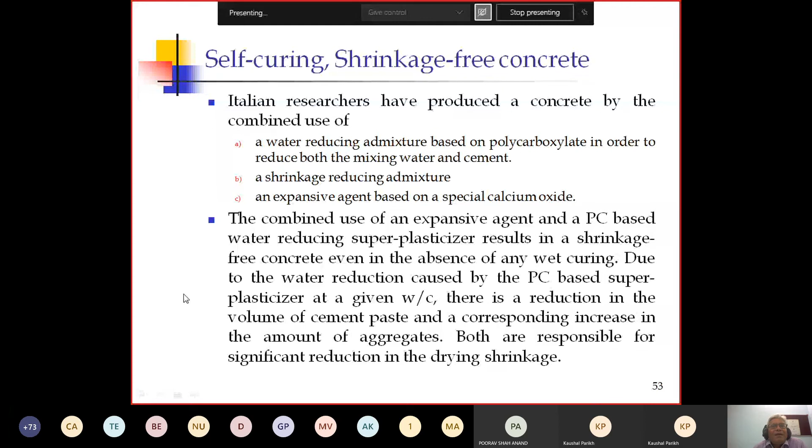In reinforcement, there is also advancement made, because as we know, traditional reinforcement gets corroded over time. Even though it is used in concrete, water and air enter from the small cracks formed in the concrete, and slowly and gradually the concrete gets corroded. So corrosion in concrete is a major concern.

Particularly for deterioration, in a highly corrosive environment, the use of advanced composite fiber reinforced polymer, known as FRP bar, is attractive as a replacement of conventional steel reinforcement. While FRP materials can be resistant to corrosion, there is a lack of ductility. So this is one of the major concerns for FRP bars: resistant to corrosion, but lacking ductility. It is more or less a brittle material.

At the moment, FRP reinforcement in India is quite expensive. The main market of FRP in India is for structural retrofit, for increasing load capacity, remedying construction defects, or repairs. So nowadays people are using more of these FRP rebars or FRP materials. FRP sheets are also being used in the retrofitting part. So FRP sheets, FRP rebars, these are to be used.

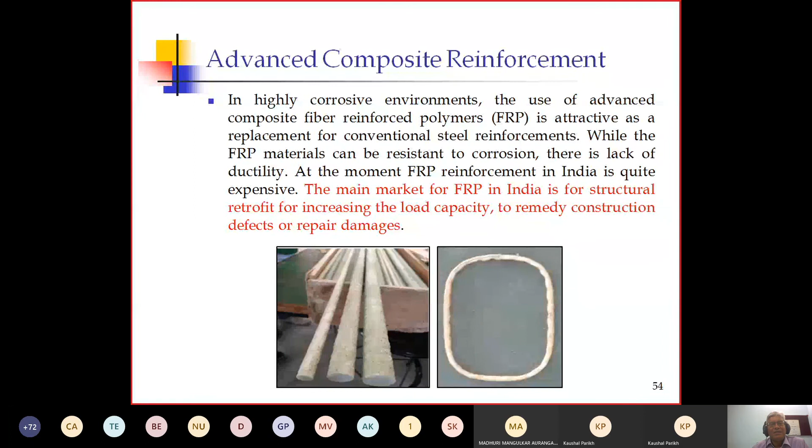So these kinds of materials are nowadays available. The main unique characteristic of FRP is that it has a linear elastic behavior, as discussed just before. But if we draw a stress versus strain graph, it has a linear behavior, but with a brittle fracture. So at one moment, then after, it is going to fail. So brittle fracture is there. So in a load versus deformation or stress versus strain graph, it has a linear elastic behavior with brittle fracture.

Its modulus of elasticity is typically lower than that of steel. As we know, the slope of this stress versus strain diagram is known as the modulus of elasticity. So this modulus of elasticity is also very less in comparison to steel. So this is also another concern of using FRP rebars. FRP bars have different mechanical properties and behaviors than steel rebars.

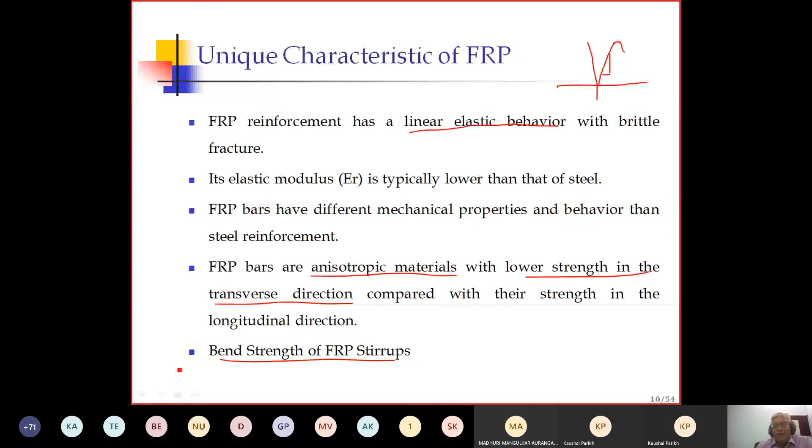One can also think of nanotechnology, because nowadays it has been introduced into various domains, including concrete technology. One can think of using nanotechnology, reducing the particle size of a material to nanoscale, that is 10 raised to minus 9. Nanoscale often imparts a new property or enhances an existing one.

One such nanoparticle is titanium dioxide, which maintains its photocatalytic activity even when mixed with cement. When mixed with cement, external cement-based surfaces become strongly photocatalytic, leading to much better appearance and significant reduction in the concentration of pollutants in the surrounding air.

Pollution is also a major concern for the deterioration of concrete. So one can use such nanotechnology compounds in concrete to make the surface better or more secure compared to normal concrete.

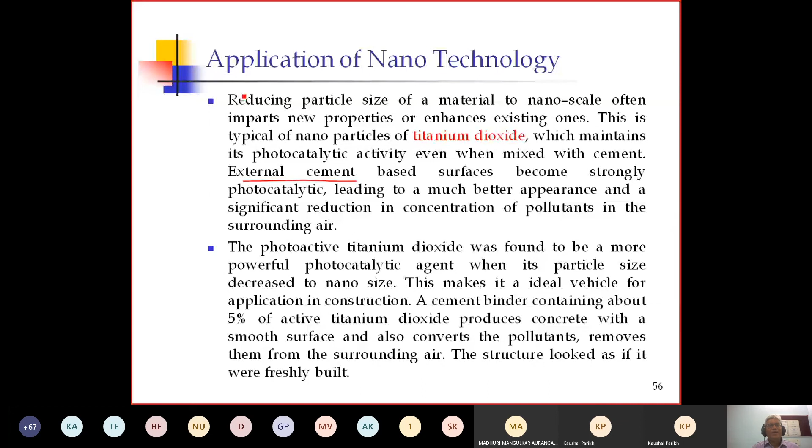Whereas if we use titanium dioxide, one can also achieve a surface that looks very fresh, like new concrete. Such photocatalytic concrete surfaces were built as early as the year 2000.

Starting from this to what is being used nowadays - high strength concrete, self-compacting concrete. Nowadays it's being used in many projects needing more compressive strength, more than M40, particularly in big mega projects. People are even going for high strength concrete, high performance concrete, self-compacting concrete. It is a need of today.

In addition to that, some advanced concrete is being used with the help of various mineral admixtures that we have discussed. So I tried to cover more - the advances taking place, across the globe, across the world, which are being used in concrete technology.